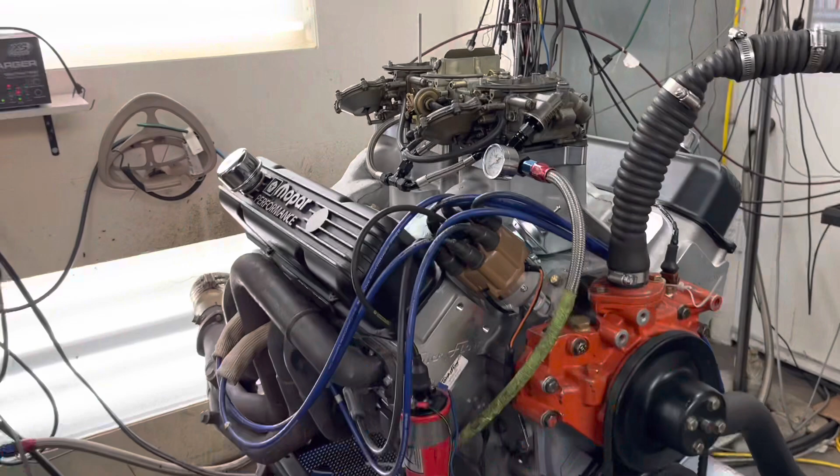Just look at this unit. Okay, so it is a 493 cubic inch big block Mopar. It's a stroker motor based on a 440. It is a stock block, but it does have a forged crank and a girdle in the bottom. We do have, like I said, the Trickflow 270 Max Wedge heads. This is the secret to the power in this big block Mopar. He's also running a solid roller cam. Very healthy compression. Pete, what's the compression on this motor? 11.8 to 1, so very healthy compression.

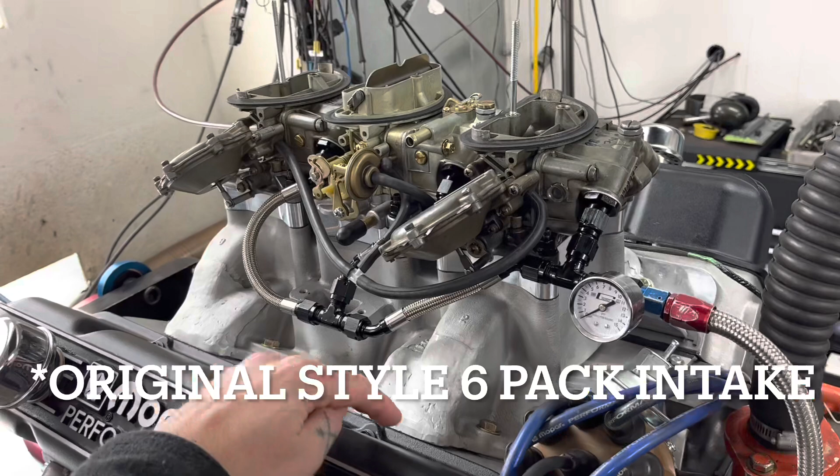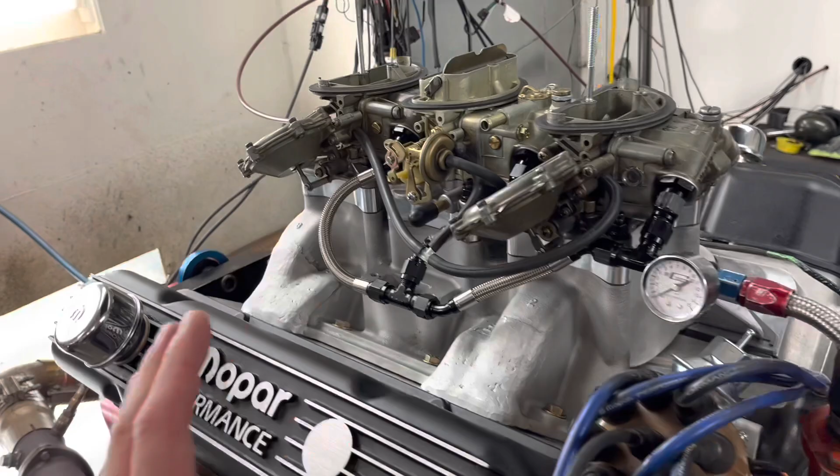And then here we go, this is the crowning jewel on top. There you see, it's an original style 6-pack intake, and you can see here all the weld that had to get put onto this intake in order to increase port size to match those Max Wedge heads. That's the whole kicker here. So some guys have done a 6-pack Max Wedge engine, but they usually use the Indy intake, which has basically a box type design and a plate you can interchange. I had trouble finding, in fact I couldn't find any pictures, videos, or anybody doing this, an original style 6-pack to a Max Wedge head.

So this thing's an ultimate unicorn. These are original style carburetors for a 6-pack, but Pete has changed them with interchangeable jets, front and back. And currently he has some spacers along the bottom of those carburetors as well, just to give it a little bit more plenum volume. He ran this thing yesterday without any spacers. I'm gonna show you guys those stats. And then today we're gonna run it as is. And we got some more tuning to do to get the most horsepower out of this as we can. Really cool build. Pete's stoked on this fuel line setup too. I'll find out who made that because he was stoked on that. It allows access to all the tuning on the carburetors.

Really nice piece though. And like I said, this thing made 780 on a single plane Dominator style intake. If you guys haven't seen that video, go back, check it out. We swapped 2 different intakes, added spacers, 780 we made on this thing. So not sure we're gonna get near that today, just because the 6-pack is almost like a dual plane design on the inside. Compared to a big single plane, it's not gonna make as much power, but super cool. You could paint those heads and put this in a 6-pack car and nobody would know. So awesome.

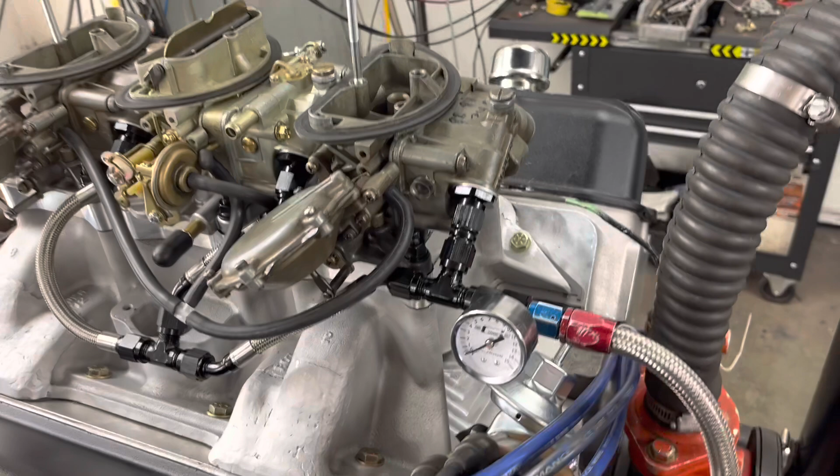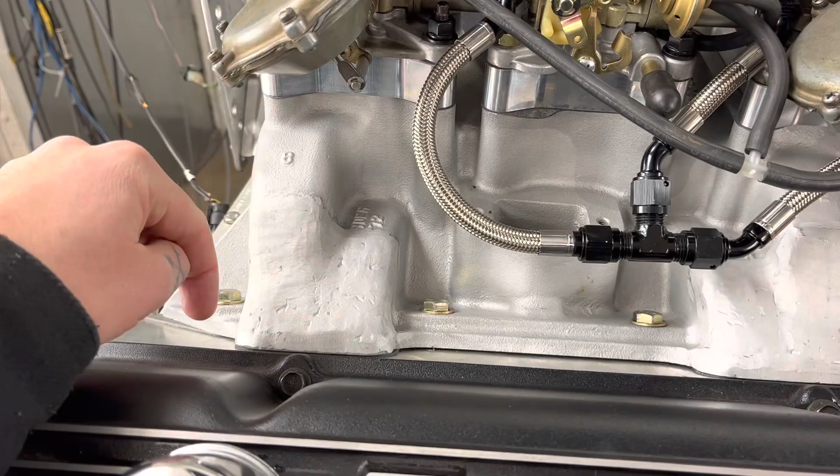A lot of welding was done on this. They really had to stack it up to bring the port up, to create the same size as the Max Wedge, then kind of detailed it down. I saw this thing off, and they actually had to weld on the bottom side as well. You can see the weld starts there, it comes all the way back. Those ports are just massive on those Max Wedge heads, and that's the problem. Well, it's not a problem, it's like the greatest problem ever, massive ports. Your ports being too big for your intake is like a good problem. That's so cool though.

If you want a little bit more info on the setup on the single plane, go back to that previous video. I think I have more on the build in that video.

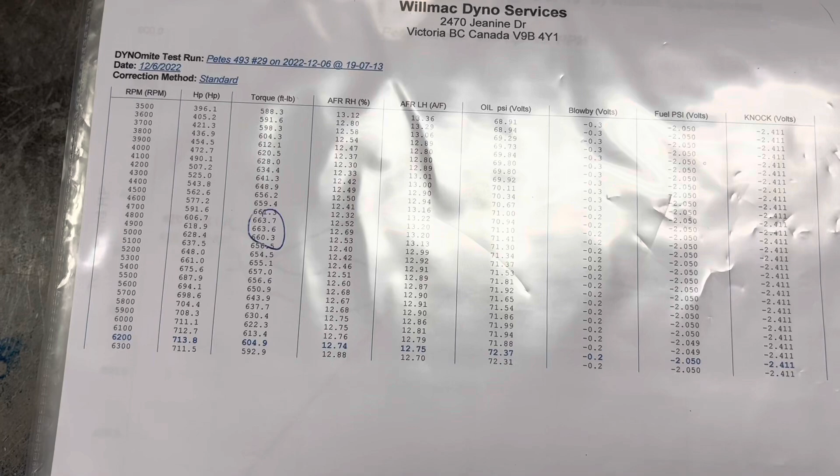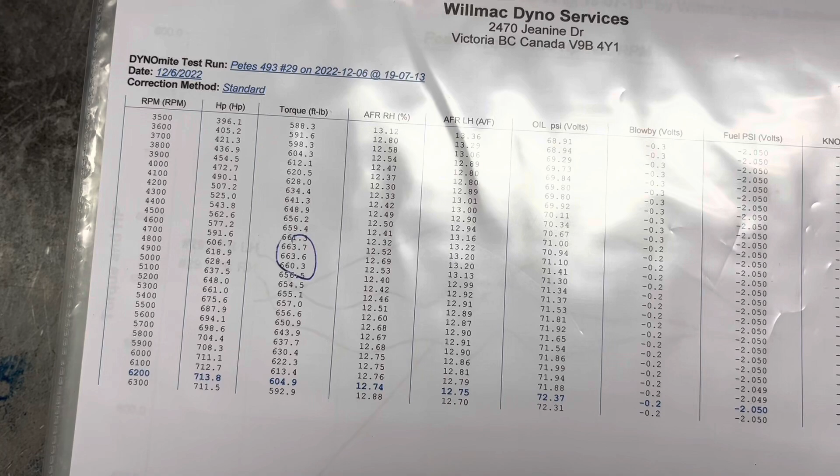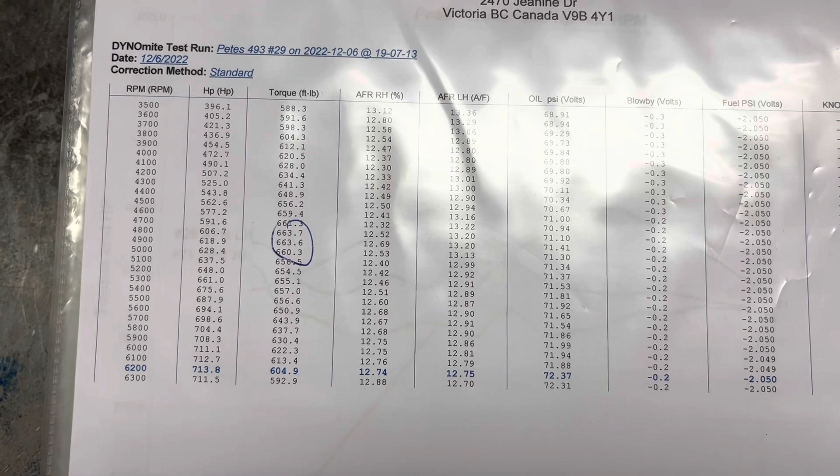Here are Pete's preliminary runs without the spacers. He made 713 horsepower at 6,200 and really nice torque at 663 at 4,900 RPM. But look at the air fuel, it's super clean, bank to bank, both sides, and this thing just makes gobs of power. Those Max Wedge heads are absolutely phenomenal. It makes me want a big block for sure, and the torque, you just can't get that torque out of a small block. That is awesome.

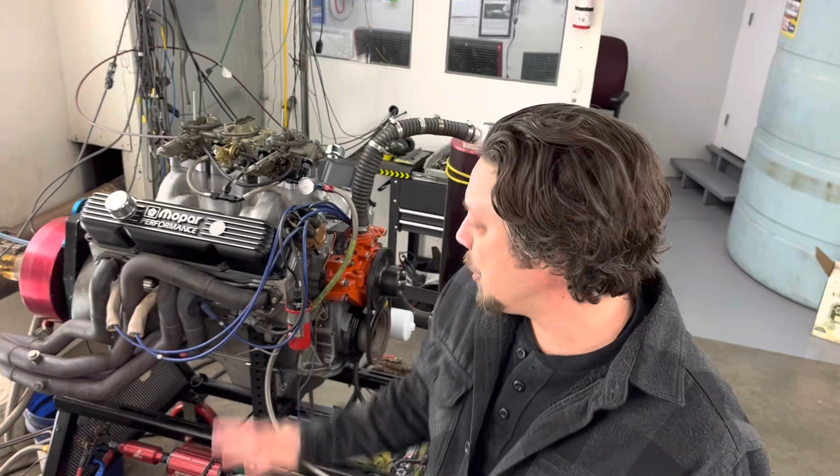Thank you. Okay, we're gonna fire up and we are gonna be running the air cleaner on it today.

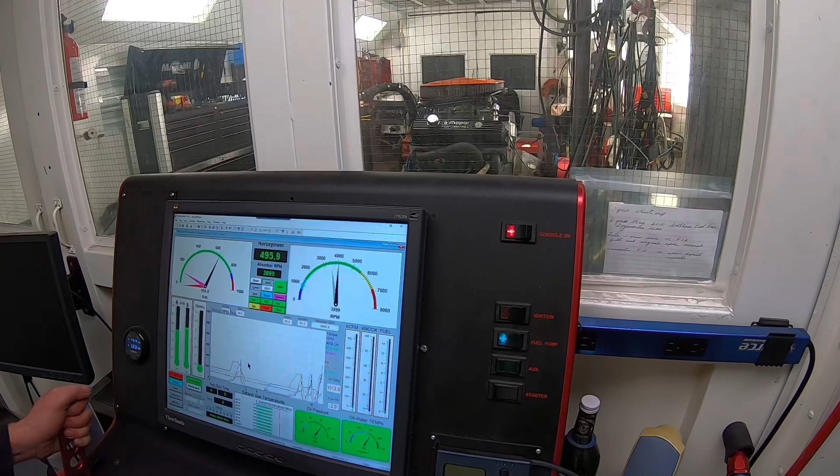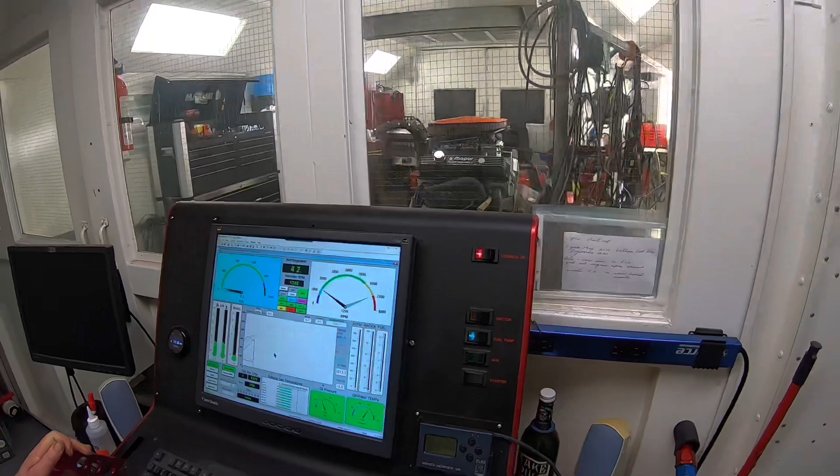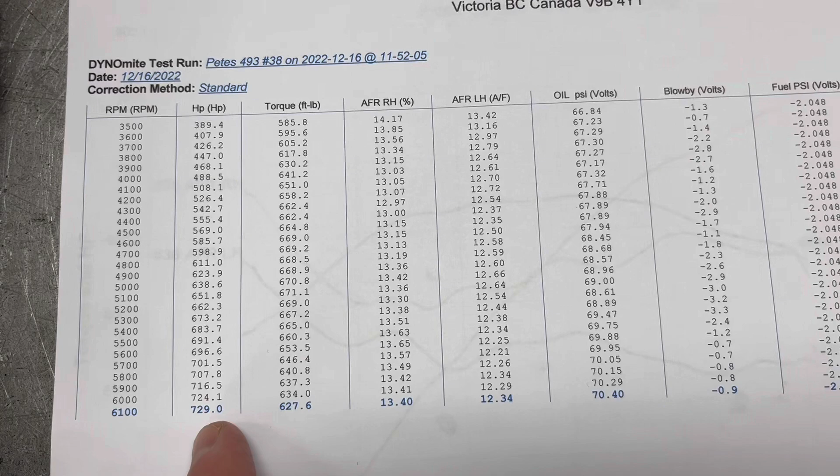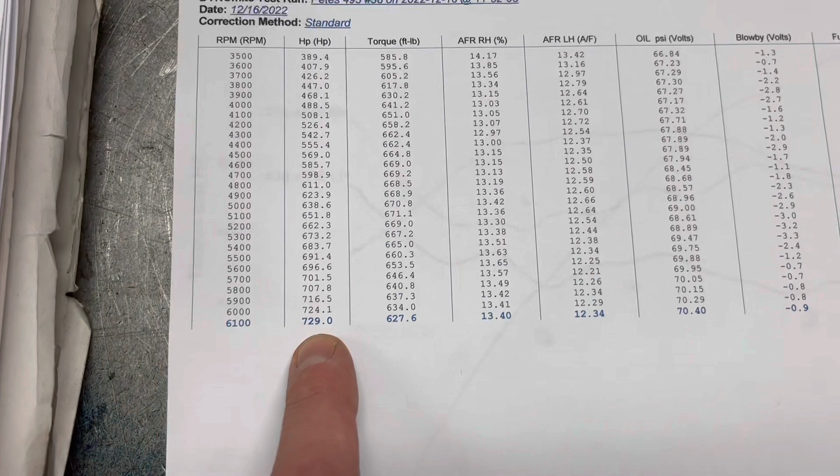After Pete got a good amount of heat into the motor, we were ready to make our first dyno pull. So you can see with those spacers, back up to 729 now, but you can see our air-fuel ratio is not very happy here. So Pete is gonna go inside the carburetors and start doing some jet changes. This is pretty interesting. Just with those spacers, it messed up the air fuel, but it picked up good power, because the best he saw before was 713 and 663. And now here he's got 729 at 6100, and I see 669 at 46 and 4700 RPM.

But that air fuel needs to be addressed. We got a lean bank. So Pete is already into this thing and doing some jet changes now.

Pete, who makes this fuel line here? Those are the Pack Max boys. So hooking up the 6-pack guys with those easy access fuel lines.

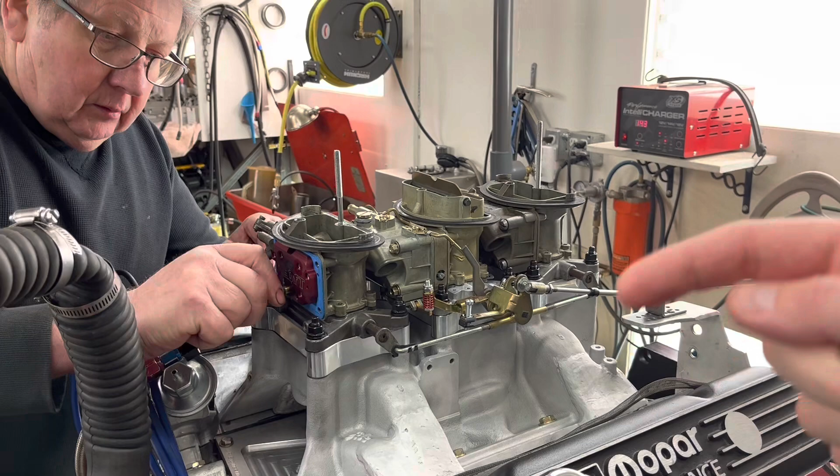Right on. We are going to proceed with stagger jetting, and we're going to go fairly radical. So from 92 square, we're going to go 95 and 90. Just doing some stagger jetting. It's a bit of a crapshoot because it is like a dual plane design, but we're going to try to stagger it, see if we can clean up that air fuel ratio.

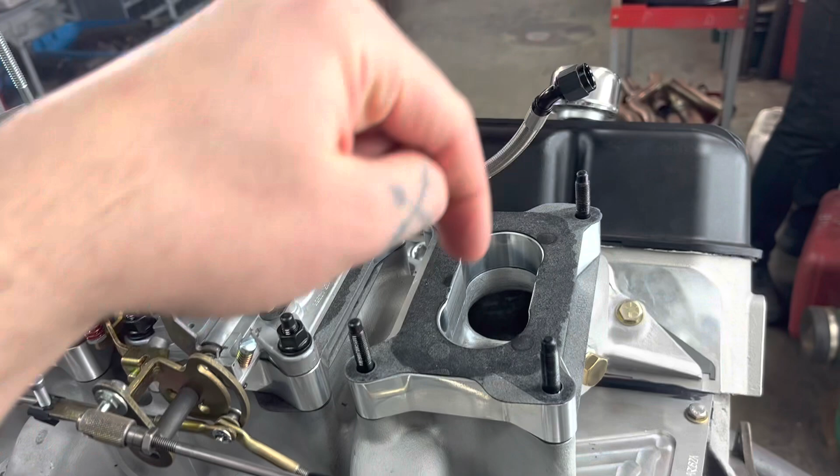Quick shot down the barrel here too. So here are the spacers. He milled those out to create an open plenum, and then I've shown you guys this divider before on a previous 6-pack video. So he's milled that down and then massaged the inlet. That's the septum divider down there. More plenum volume, better flow, more power.

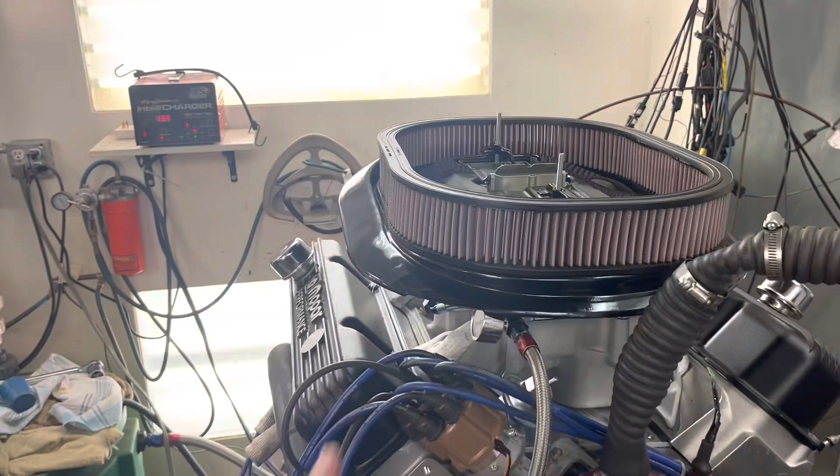Okay, jetting change is done. Air cleaner going back on, ready for our next pull.

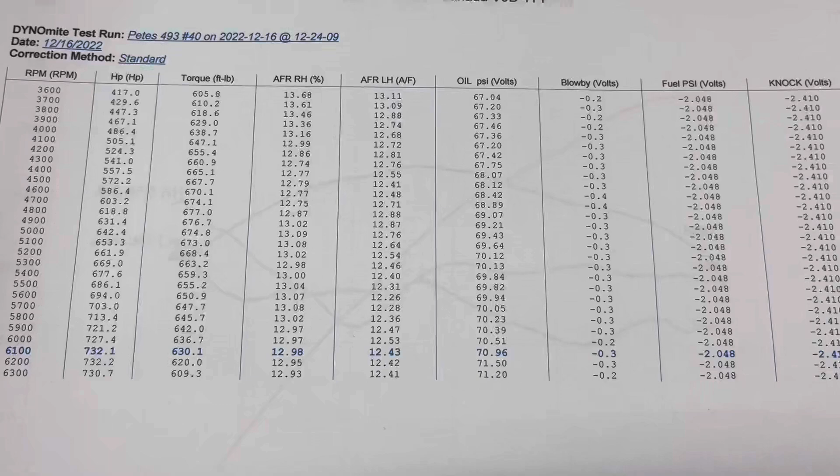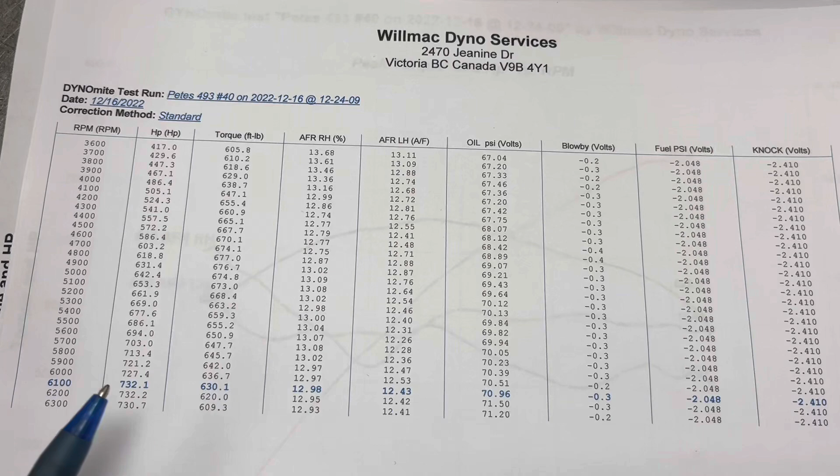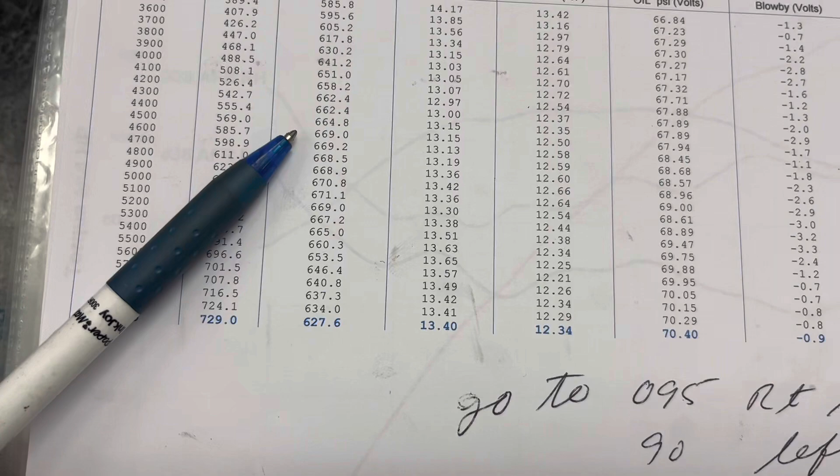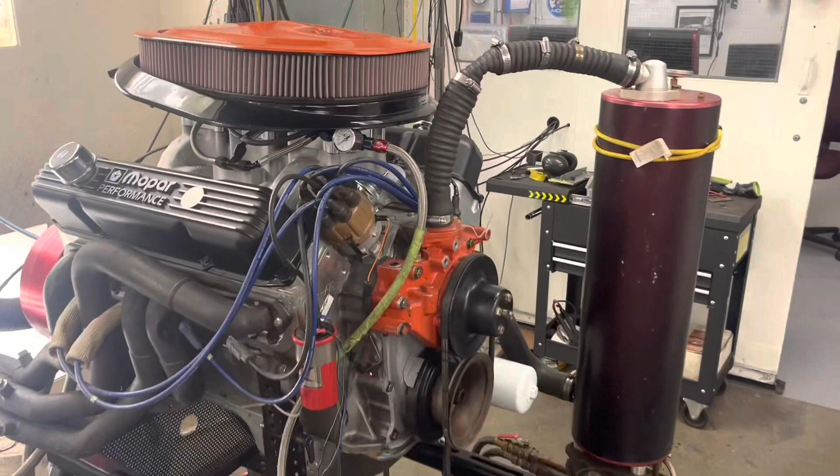So Pete's staggered jetting totally paid off. Look at these air fuel ratios, much better. He's really happy about that, and then really happy about this: 732 horsepower now at 6100, and look at the torque in here, 677 now at 48. So he picked up, where were we at before? He picked up like 6 or 7 foot-pounds, another 3 horsepower, and a much better air fuel ratio with that staggered jetting on a dual plane. That's pretty cool. Well, not a conventional dual plane, of course, but you do get crossover. So a little leaner on one bank, fatter on the other, paid off.

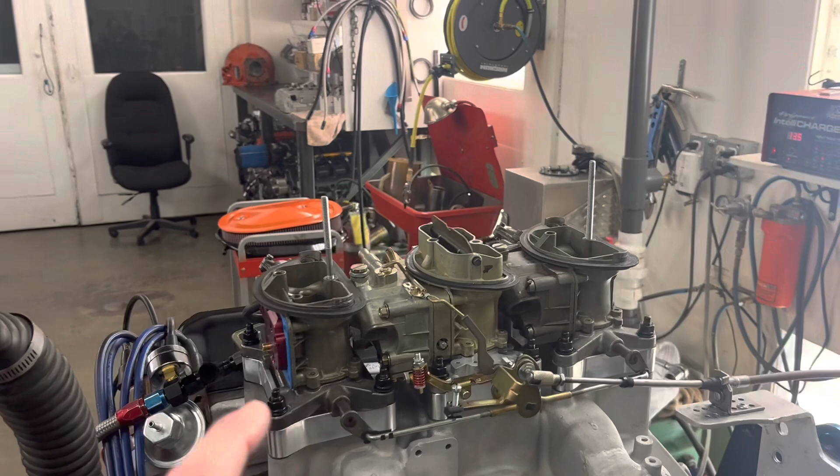Okay, so Pete is diving back into the carburetors to even get a little bit more even air fuel ratio, bank to bank. Pete, what's the jet change we're making here?

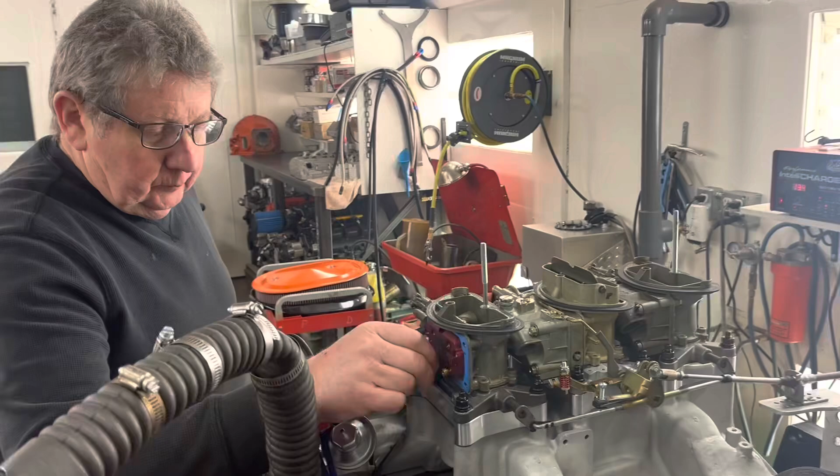We're just going one number. On the right side, we're going to a 96 from a 95. And on the left side, we're going from a 90 to an 89. So just a minor change in the front and the back, leaving the center section, and hopefully this will even clean up that air fuel just a touch and squeeze out a little more horsepower.

Hell yeah, brother. Anything cleaner.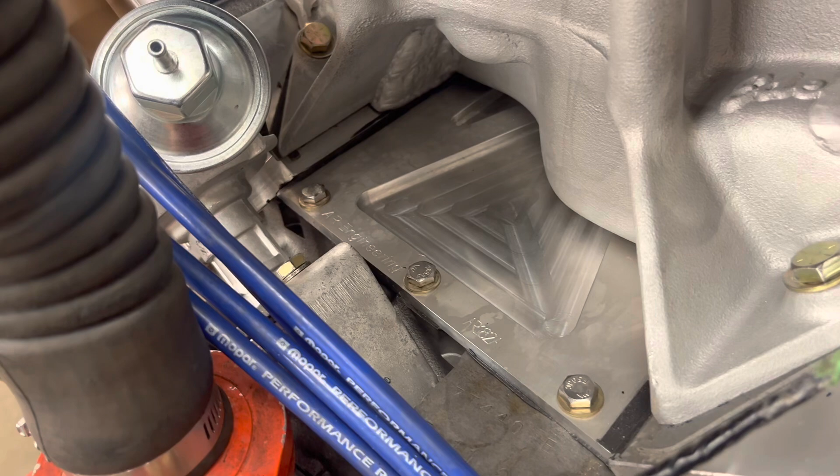Show you guys just real quick, that lower plate, a lot of guys asked about the company that makes that. Looks like it's AR Engineering. Really nice piece.

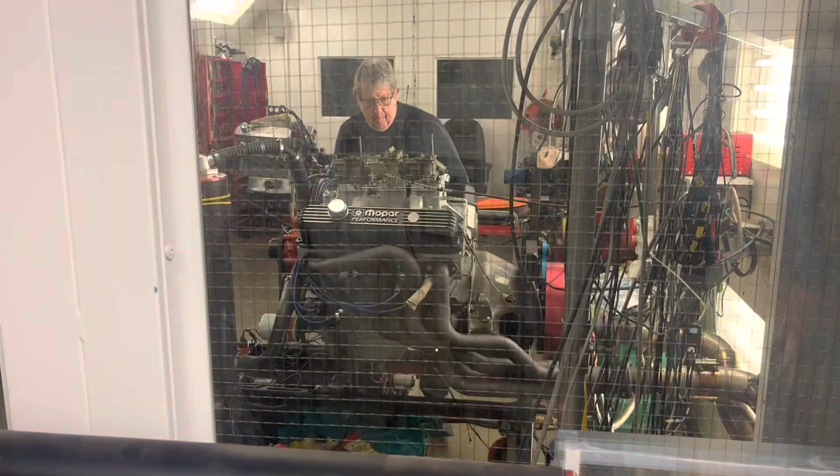Okay, jet change done, air cleaner's back on, ready for another hit.

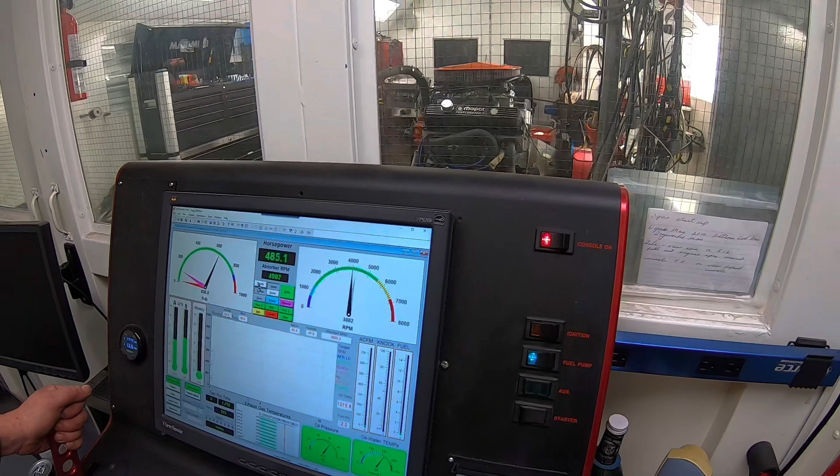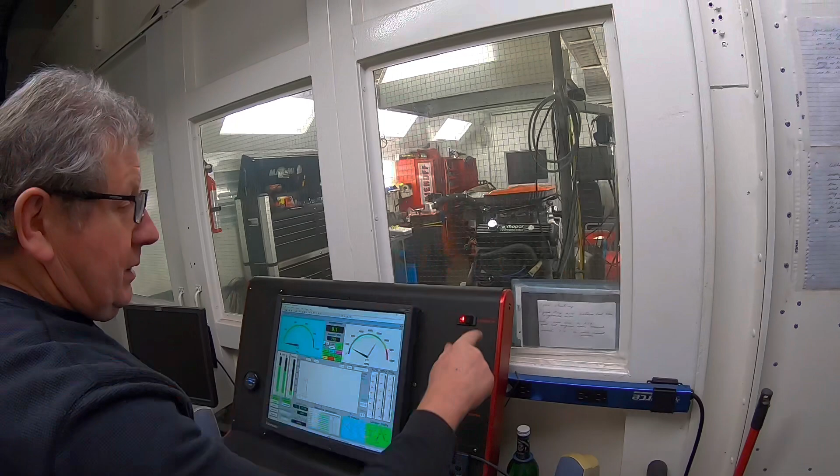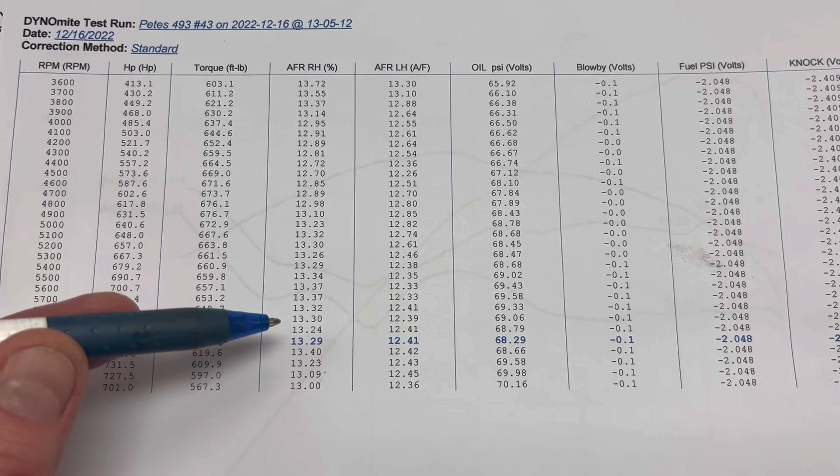So on that last dyno hit, the power levels were pretty much identical, but you can see even with that small jet change, it kind of threw it back into the lean zone here and the fat zone here. So Pete is going to switch her back to the 9590 stagger he was on before.

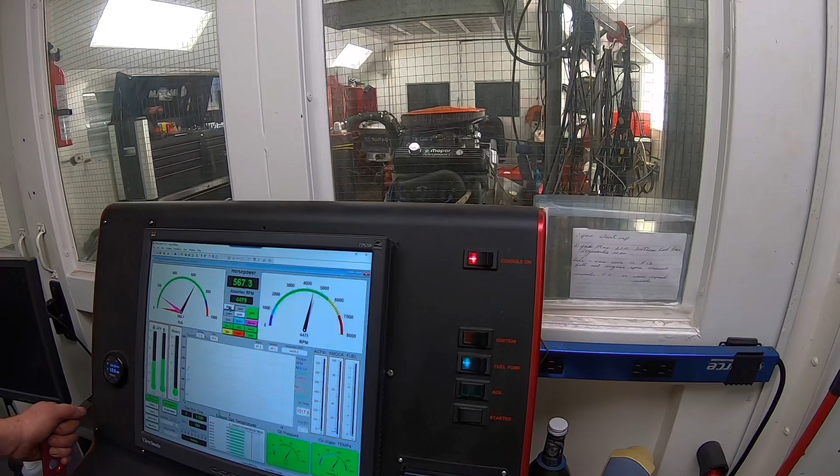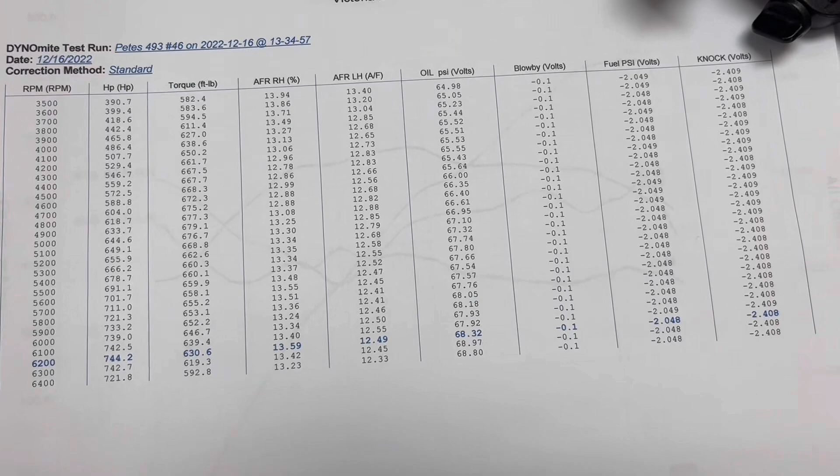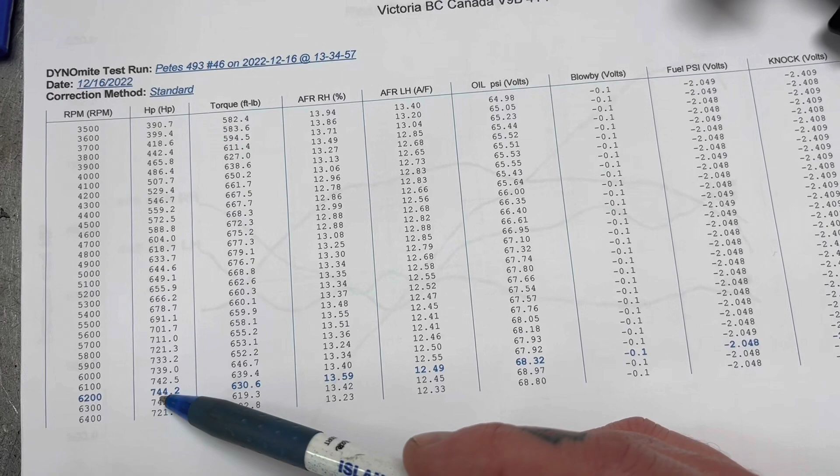Okay, so back to that jetting that we were really happy with. It made a couple hits, got some good heat in the motor, and then we saw the biggest power of the day, 6,200 RPM, making 744 horsepower, and the biggest torque we saw today too, 668.8 at 51, so that jumped up quite a bit too.

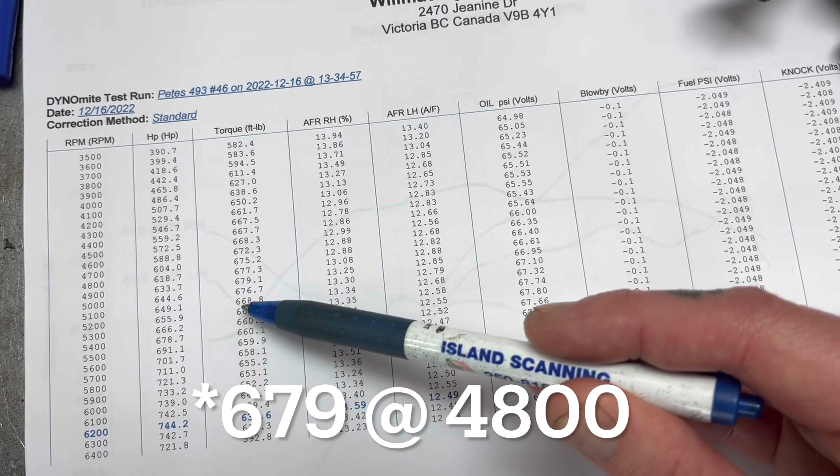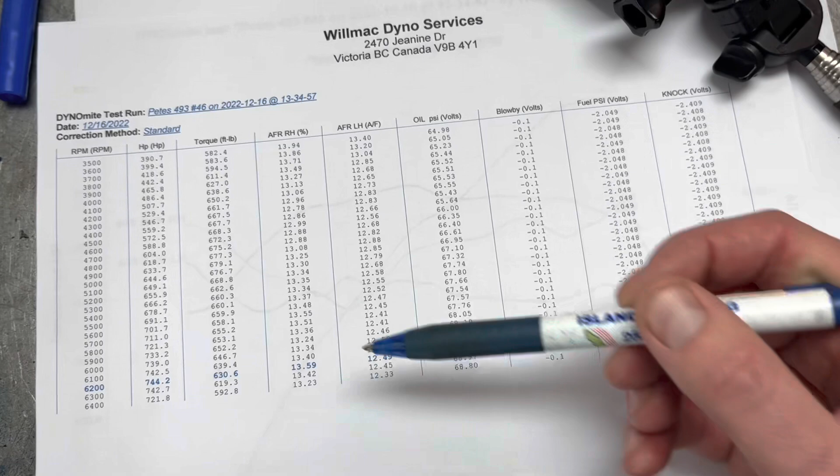Air fuel ratio is kind of going back the way it was before, but the power is just coming through. This just might be what happens with those 6-pack motors. Pete's been fighting this all day. He's definitely happy with his power number, but he's not too happy about the air fuel, so his new plan is to switch it back, take the spacers out, and run it square jetted like he did originally.

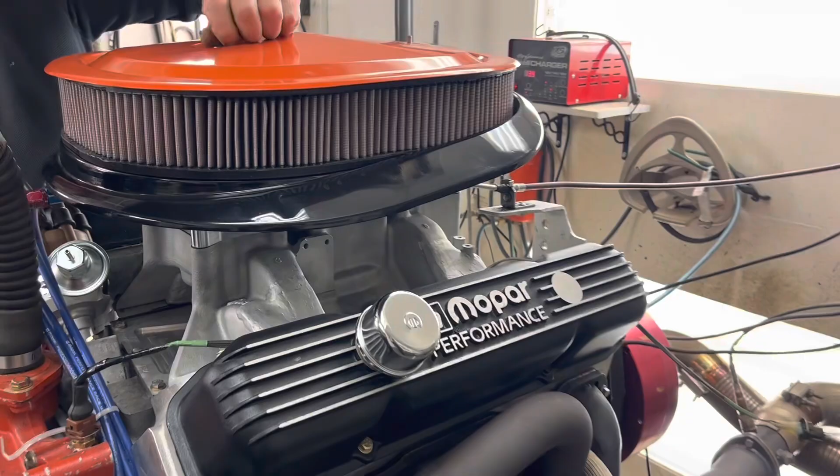Without the spacers, with lighter diaphragms, and changing the spring diaphragm as well for better transition. Okay, so we are back with the 6-pack, no spacers now, and back to that square jet where Pete had it before. Air cleaner's back on, ready to make a pull.

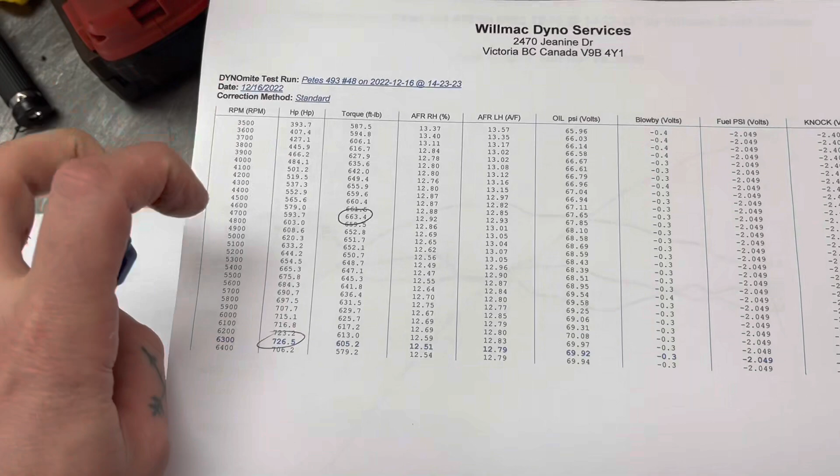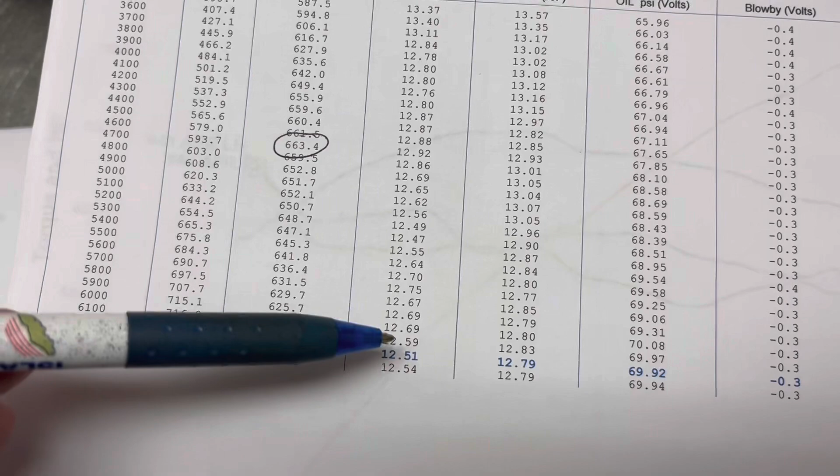Okay, so with no spacers, back into sleeper mode, still making 726 at 63 and 663 at 48. Look at the air fuels though. That thing square jetted without the spacer is really clean. That's pretty interesting considering the spacers were open. We had to run a bunch of stagger with the spacers to make 744 at 62 and 679.

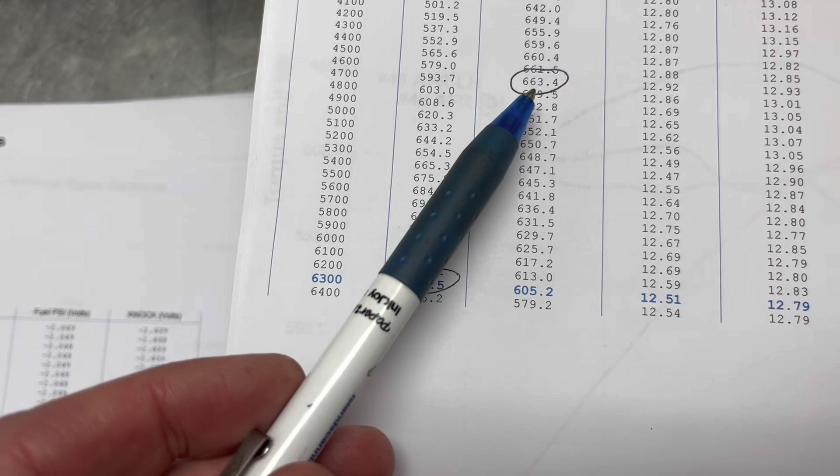So you're giving up almost 20 horsepower and close to 20 foot-pounds as well. But this thing will fit under the stock hood of a B body, total sleeper mode. Max Wedge 6-pack win. Okay, so that's closing out the video on the 6-pack Max Wedge engine.

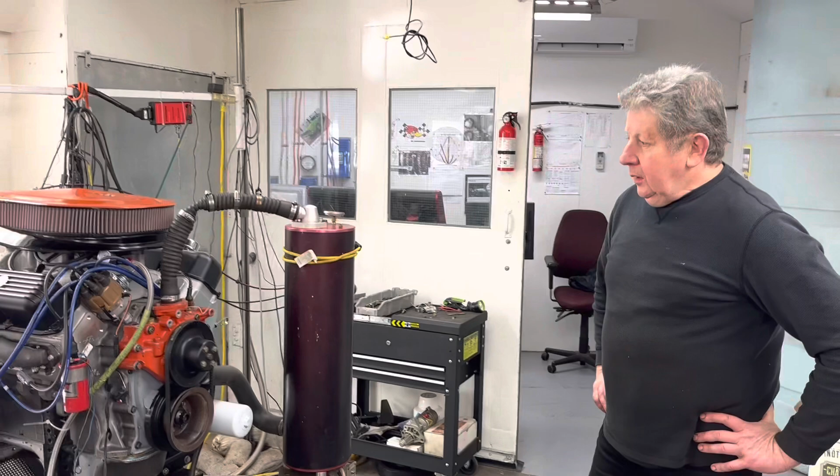Pete, you want to add some thoughts to it? I just want to thank Joe for coming up and entertaining both me and you. No problem, buddy, doing a lot of conclusive testing.

We've now found that with perfectly square jetting, the manifold is 100% happy, air fuel bank to bank, yet you put spacers in there and it goes completely sideways. And we found that the spacers were worth an additional, what, 18, maybe 20 horsepower. So a substantial increase with the spacers, but either way, we have the bucket list Max Wedge 6-pack that has now come to fruition, and a high water mark of 744 horses, nothing to be ashamed of.

And possibly, where is this engine going to live in the future? Well, currently we haven't made that decision, but want to put it in your Dart? Kinda. Boom. Okay, what a combo.

That's it for this video, the 6-pack Max Wedge engine. Let me know in the comments, have you ever seen a 6-pack motor make 744 horsepower? Or have you ever even seen a proper 6-pack intake on a Max Wedge head? I bet you won't be able to find any info on either of those.